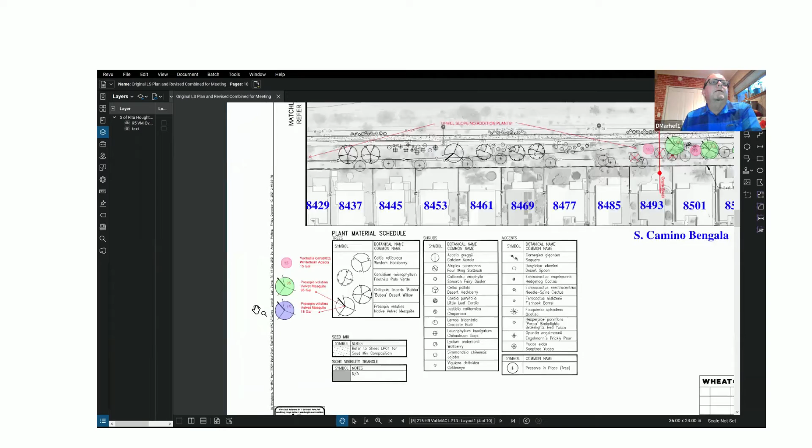One of the things I'd like to explain is what these colors represent - the velvet mesquite that we talked about. The green is the larger tree, the 95-gallon tree. If you see purple, it's a 15-gallon tree. And if you see pink, it's a 15-gallon white thorn acacia.

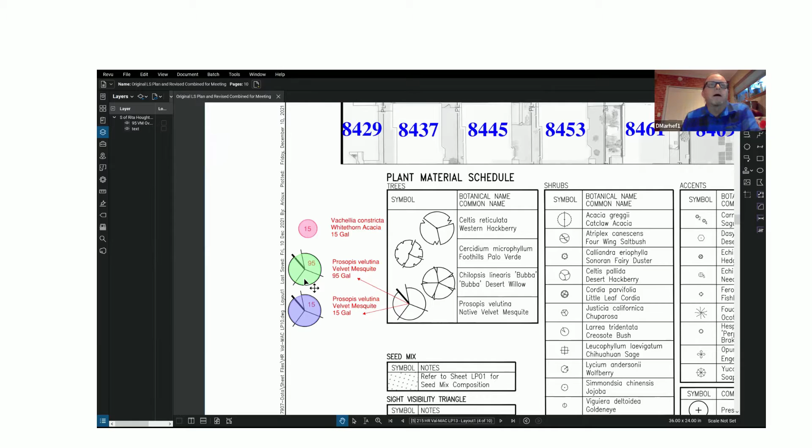There's also some other trees on here. A couple of these are deciduous, so what I did was replace those with semi-deciduous trees so that there would be some kind of leaf cover year round. We can talk about that.

And then on to the next section. You can get an idea. What I'd like to do then is go back through here - if anybody has questions and would like me to zoom in on a specific property, we can do that.

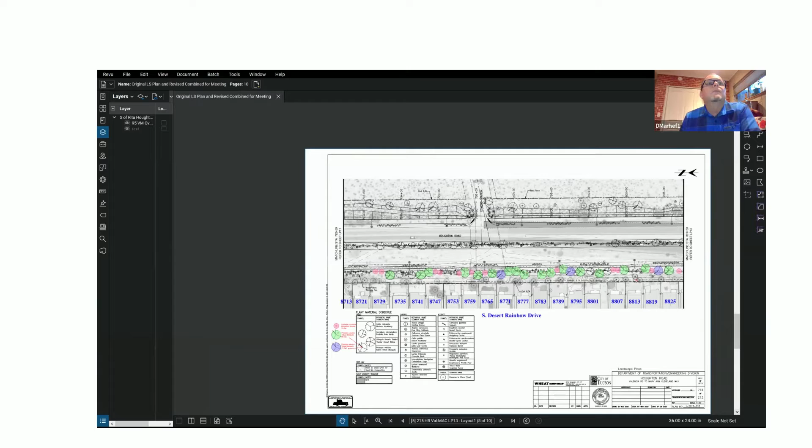Yes, can you zoom in on 8565, please? 8565? 8565? Yes, it was your third. 8565. There to the left there.

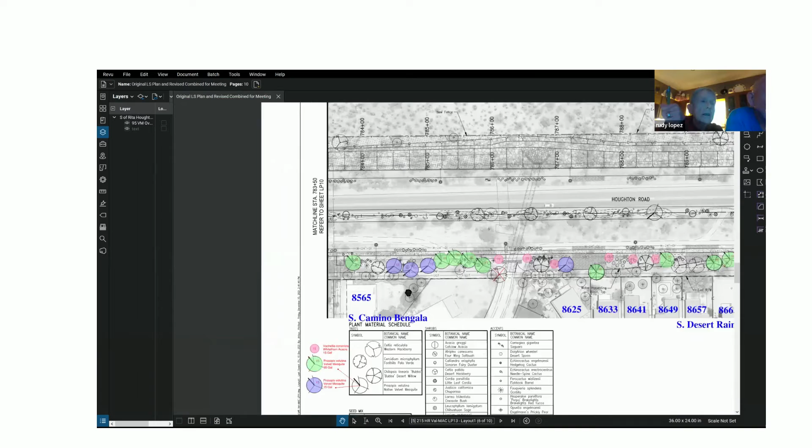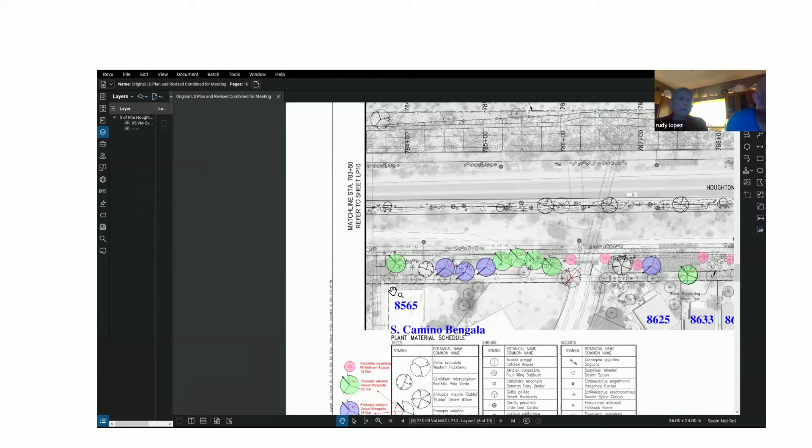Sure, so you can see here - if you can mute again, that would be helpful. Mute again. Okay, excellent.

So here behind 8565, the original plan has a foothills Palo Verde in here. And then there was also - let's go back and see what the original plan had. 8565, so you had some velvet mesquites and the foothills Palo Verde.

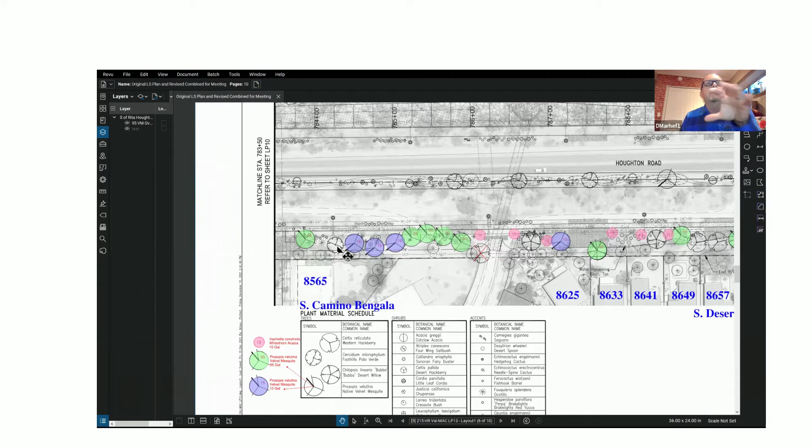So what was added in then? We added an additional velvet mesquite. What I did was I went and stood on the sidewalk, essentially looking at each property, the different vegetation that was in here, the existing vegetation on the other side of the wall, and I factored all that into the decision making.

So there is a large 95-gallon tree going in this section to fill in these gaps. There's also, because of the vegetation behind the wall and on this side of the wall, a lot of coverage on 8565 already, and we'll also be adding the 15-gallon velvet mesquites in this area. Then on the property line, there's another 95-gallon tree that'll be going in.

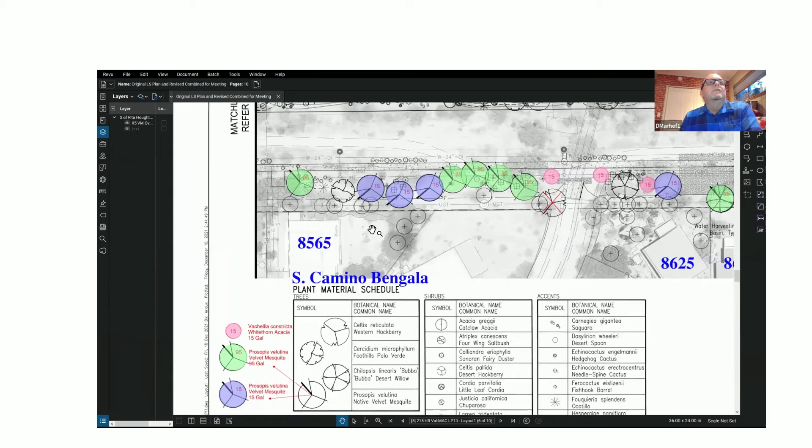Along with that, there's some ocotillos going in and some other understory vegetation. There's some vegetation going in between the sidewalk and the street in this area also. Does that help?

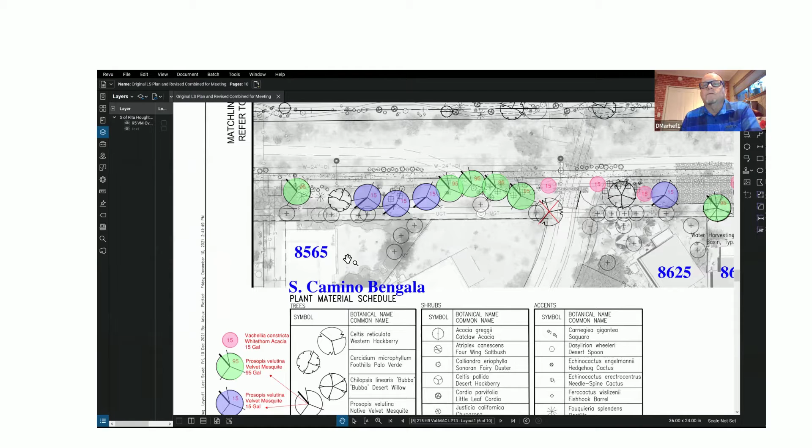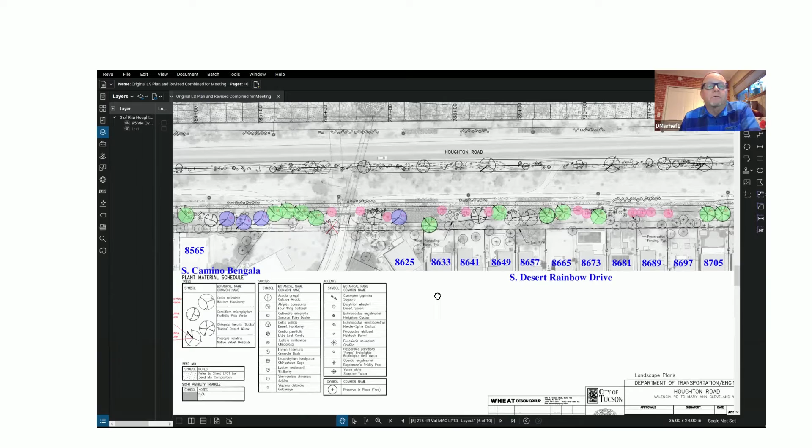Okay. Did anyone else have any questions? I do have a general question and request - will these plans be available online to review and potentially comment on? Yes, we can make them available to you. That would be excellent.

I had a question - 8437. 8437 is in an area... 8437 is in an uphill condition.

So there's an existing tree here and it's uphill, so the view out over the top of the wall will actually look out over the road. So the original plan is what we'll be putting in.

We'll be adding 2 of the 15-gallon Bubba desert willow trees in this area. They're deciduous, so they will drop leaves in the winter, so you'll have the view of the mountains, but they will also have leaves and flowers on them for a long period during the year.

So it's going to pretty much block the view during the summer, as they're 15-gallon trees. These are a hybrid desert willow, so they don't get as tall as the native desert willow - they get to about 15 feet. So they won't be blocking your view that much, plus you're already in an uphill condition in this area.

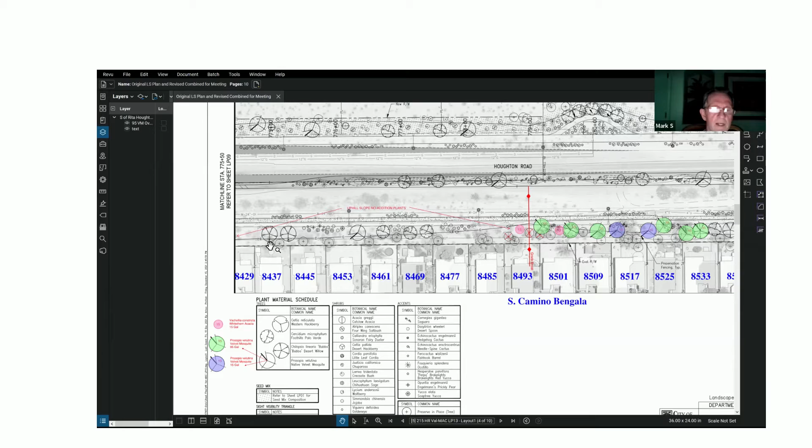Okay, now I take it the circles with the plus signs are the existing tree, right? Exactly, sir, exactly. Okay, because that one's more or less kind of misplaced, but okay.

Yeah, where they fall on the plan - when these were originally laid out, they were laid out with the aerial as it is, and it's kind of guesswork as to where the trunk falls because the canopy can be a different shape. That tree at 8445 behind there is more or less on the boundary, pretty close to the boundary line.

There is actually, right, it looks like there's another one right in this area that got missed. So on the uphill slopes, I did not go back and verify where the existing things were, just because I knew we weren't going to be changing the plan in that regard. So I didn't go and make sure all the existing things were on the plan on the uphill slopes.

Okay, now I have one question. Sure. Concerning the existing trees.

What's going to be done as far as maintenance and trimming, because those two trees, one of them extends over my wall, and my HOA tells me that the city's going to take it over. We don't know who's in charge right now, so they won't do anything as far as trimming the branches that are over my back wall.

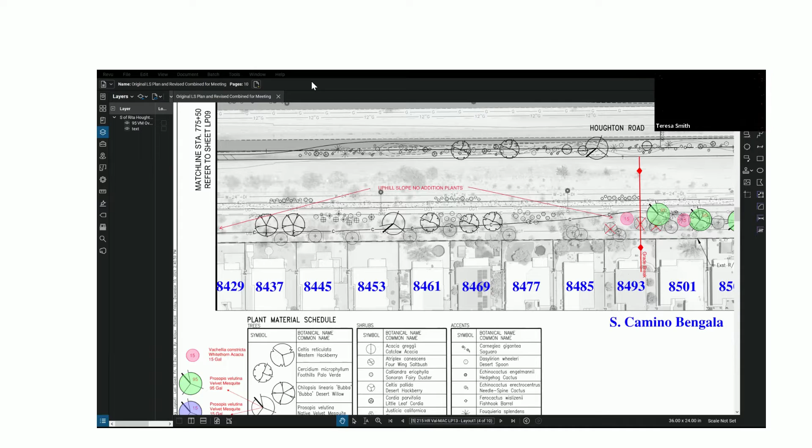As far as the plans show, I believe the gravel goes to the wall, and it will go under the existing trees as well, so there's continuity on the project. If you drive the project currently, you can see we've started to lay down some rock already, so you'll get an indication of what that's going to look like. There's finer rock in the medians, and what we call a desert cobble mix on the shoulders. Some areas will also have seed mix mixed in, so there'll be more of a native looking vegetation in those areas.

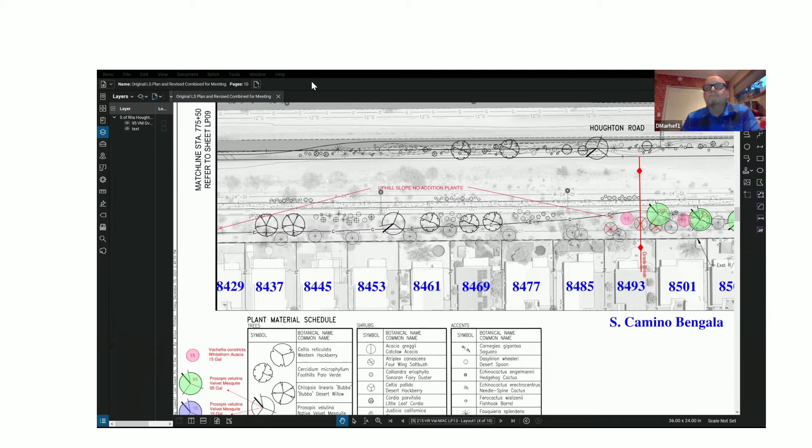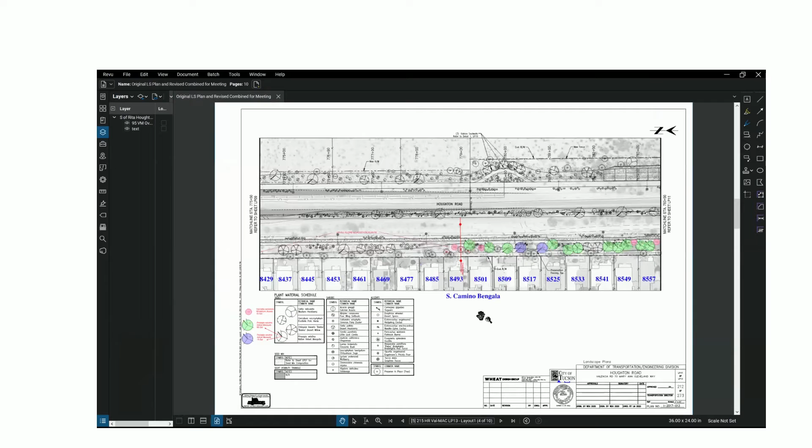Did anyone else have questions about specific properties? Yeah, I'd like to see 8843. 8843.

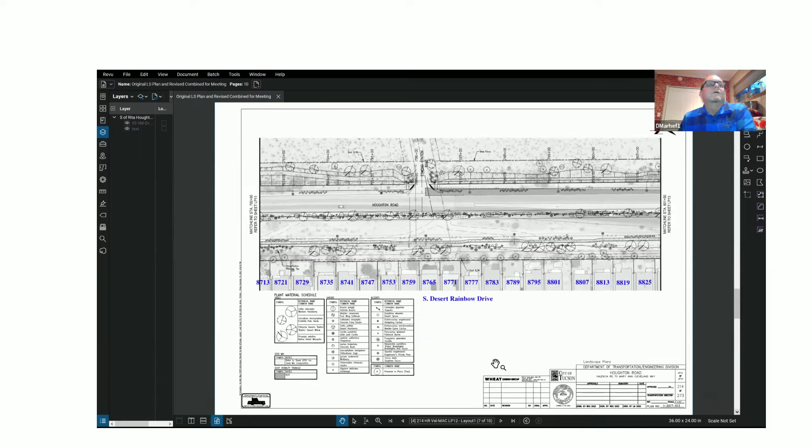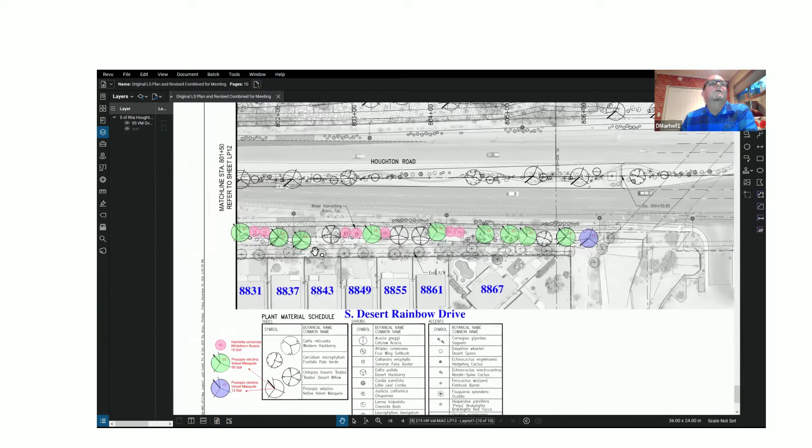So you can see here at 8843, there's a very large existing tree in this area, and also some vegetation within the yard. There's proposed on this property line to the north, a larger tree going in, a larger velvet mesquite. There's also a 15-gallon desert willow going in, and two white thorn acacias we'll be putting in as well. The white thorn acacias have a mature height of about 10 feet, and they fill out pretty well when they're on permanent irrigation.

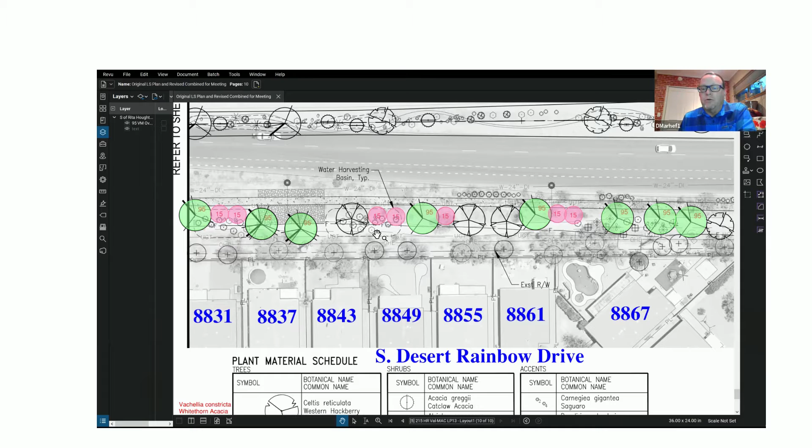Does that answer your question? It does, thank you. And there's some understory plants under the desert willow as well, so there'll be some additional planting in there.

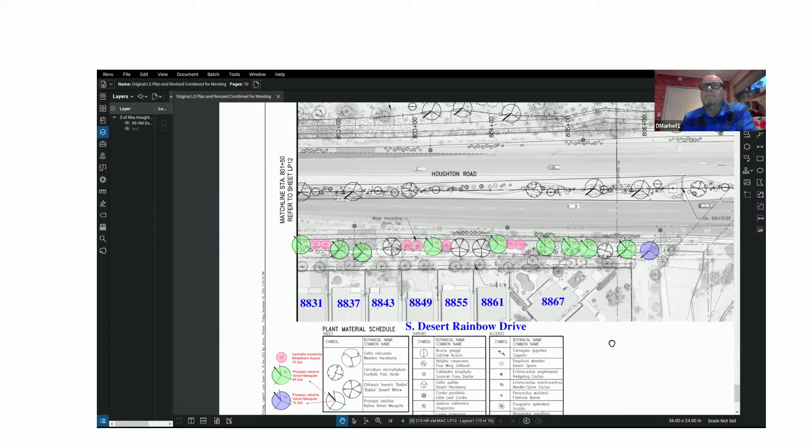Anyone else have questions about specific properties or just in general? How about 8801? 8801? Yes.

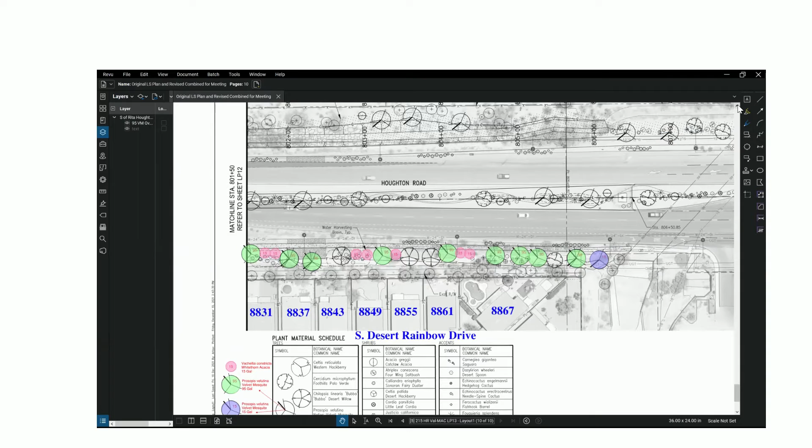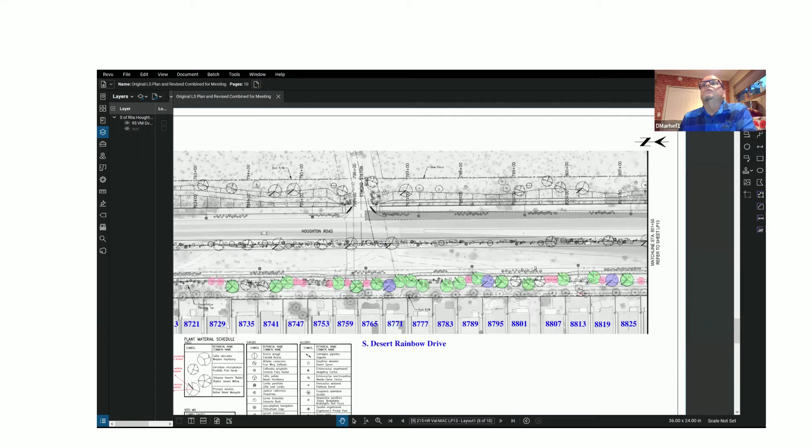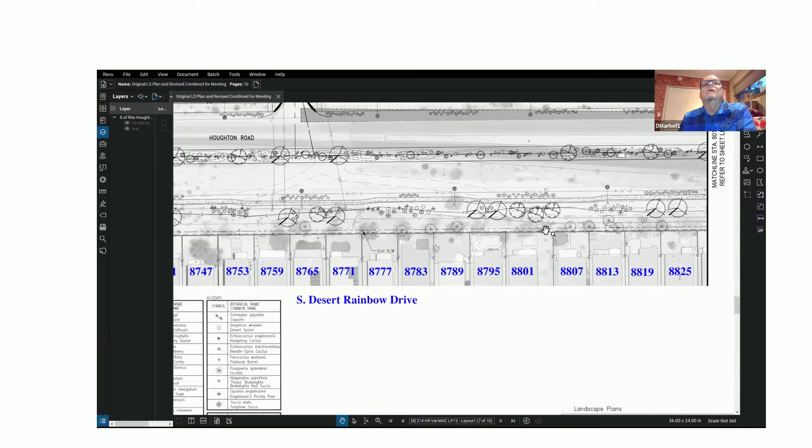So 8801, let's look at your original first. We had some Foothills Palo Verde in here, and what we went with after looking at that, there's still Foothills Palo Verde. There are some existing trees here. This looks like an existing tree, but it's not -- it was either shrubs or something, or it was taken out during construction. So there will be a 95-gallon going in this area, along with the two Foothills Palo Verdes on the side.

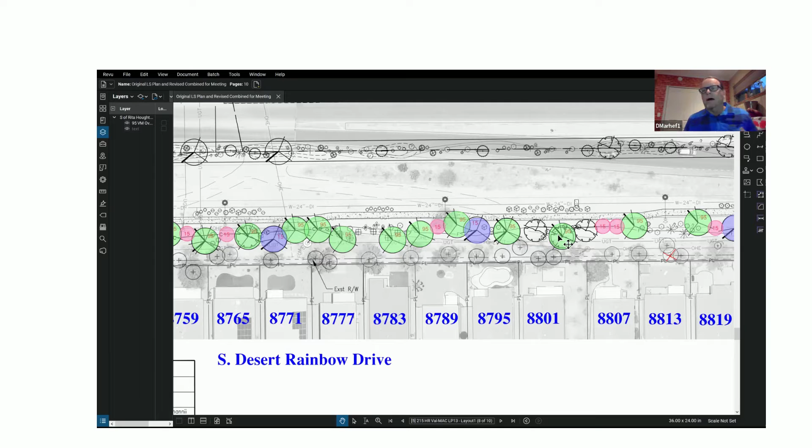So the coverage -- the Foothills grow a little bit slower, so we'll be putting those in at 15-gallon size, but the 95-gallon will go in at the size I showed you, with the woman standing next to the plant. Now, these are all going to take a little bit of time to fill out, and it will require some patience on your part, but putting in the larger trees will get that fullness a little bit higher, a little bit quicker. Anyone else?

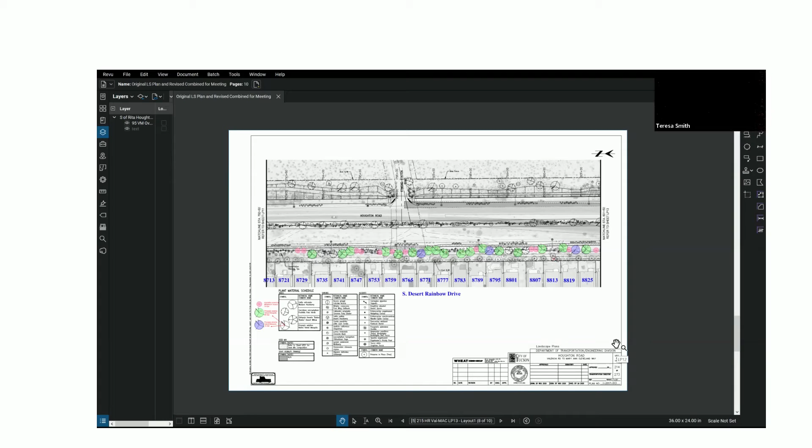David, Rudy put in the chat that the HOA was told the city would maintain the existing trees from the wall to the sidewalk. That's actually the first I had heard of that, and that would be different than what we've done before, like in Civano and some other neighborhoods. So we'll have to circle back with you on that. I'm not sure who told them that.

Typically, we don't take care of existing HOA trees, and usually we only maintain the trees that are planted by the city. It's part of the contract, actually. For 2 years after this project is complete, the contractor is on the hook to make sure that the plants are alive and that the garbage is cleaned up. I personally go myself and walk the entire project looking for dead plants, trash, and things that are supposed to be covered in what we call the landscape establishment period.

Perfect. He also had a question - this kind of leads into the next phases. He wanted to know what the time frame would be for completion. So that's going to depend.

We had a comment about putting these up for sharing and things like that. Right now, we could get this started pretty quickly and get this moving. As soon as we have finalized that everybody's on board, and if they're okay with this plan, we can roll forward with that. That's kind of what the contractor is waiting for - they're waiting for us to give them a final okay on this. And then we can give everyone else a better indication of how long that will take.

To be frankly honest, we need to move quickly because they've been ready to do the landscaping for over a month now, and we've kind of put them on hold. We all know that when we put things on hold, the price just keeps going up, and we need to get those trees planted if we want those big ones.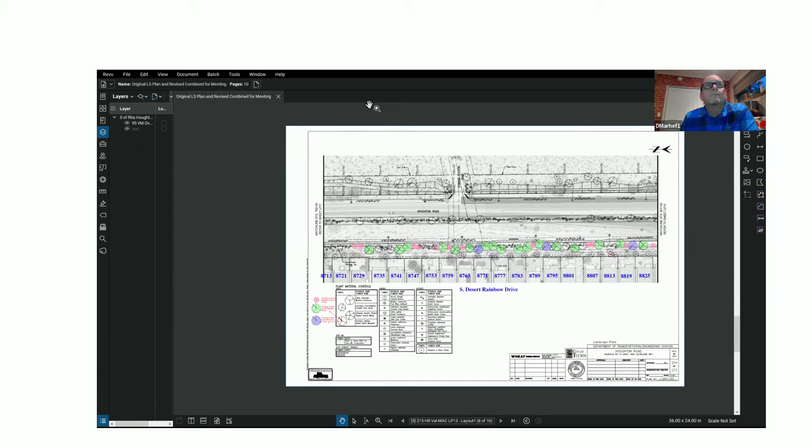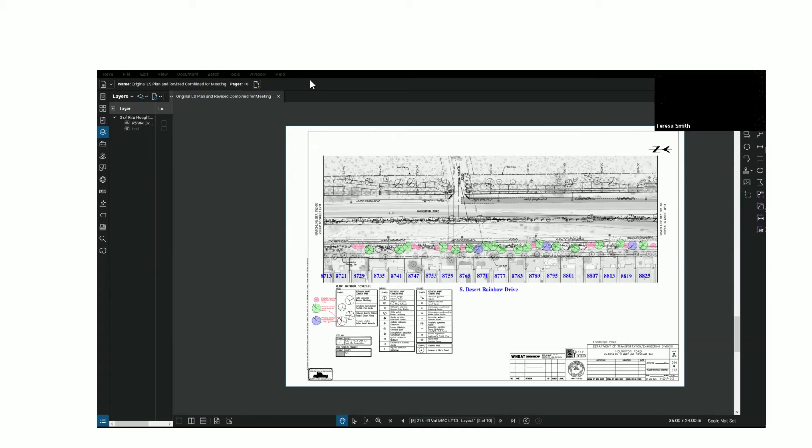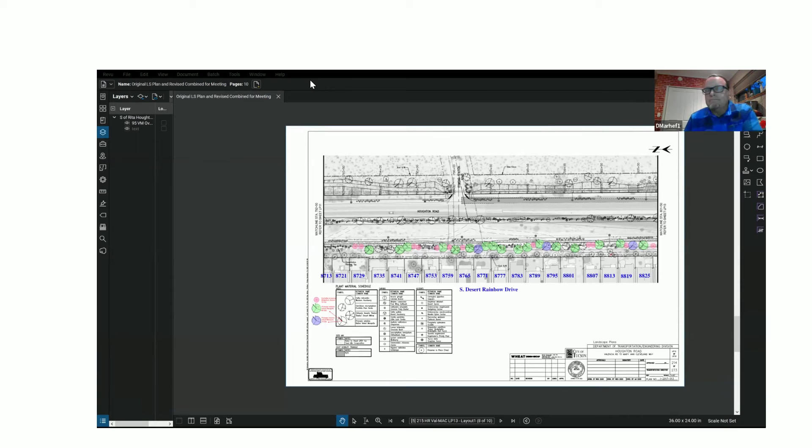Is there any other questions before we move over to Robin? Or David, did you have anything else you needed to share? I don't - if anyone has any questions, feel free to contact me. You can email me with any questions you have and I'll be happy to answer them. Fantastic, if you can put your email in the chat, that would be great for everybody.

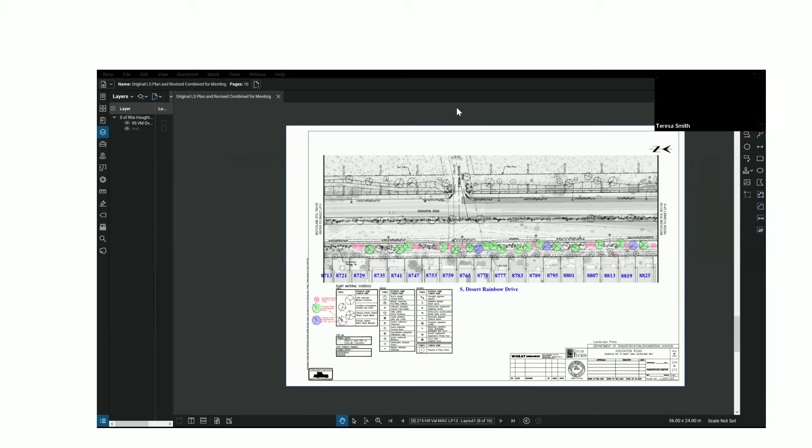Great, I think if you're ready, Robin, we can kick it on over to you. Robin's going to answer one of the questions that came up at the end of last meeting. Al Wyruth, the president of the neighborhood association, had asked about the possibility of the city being able to pay to raise the brick walls in the back of your home - your existing wall - and what that possibility might be if neighbors chose to do so. So we're going to go ahead and kick that over to Robin.

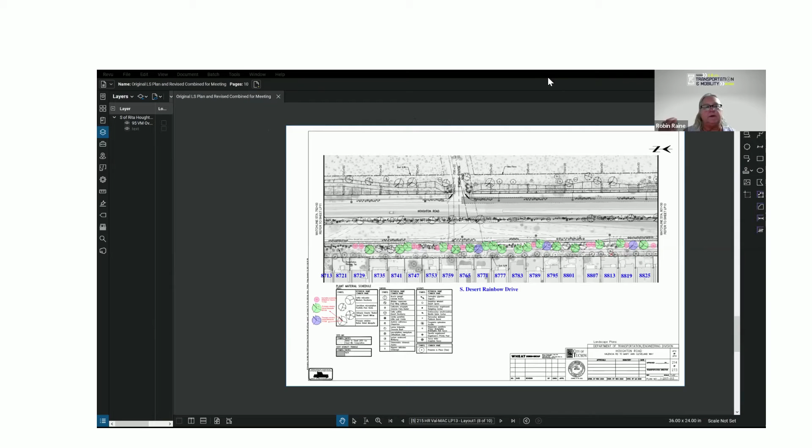We'll have a form that those who choose this will be able to fill out for reimbursement, and it'll include things like the need to have a qualified contractor. That language isn't quite worked out yet, so we don't have the application right now. But the deadline for turning in those reimbursement forms will be the end of this calendar year, so it's almost a year away.

So we're working on the form, and if you want to hold off a few weeks to get your contractor, you'll be able to see the form and see more exactly what we're needing the contractors to be, and what you'll need to tell us about them.

Lastly, I want to make sure you heard that the deadline is the end of the year. Mainly we want to make sure we know that you've done the work, you've got the invoice, and you've got the proper contractor, and then we'll be able to do that.

But I'd wait on sending that information right out, because we'll have a form with all the ways to prove your contractor's qualified and all that stuff. So, any questions?

Robin, this is Al Wyruth. I have a question for you. What happens if people have already had the work done by a contractor, and that person may not be on your qualified list? Would they still have the opportunity to submit and get a reimbursement up to $2,000 by the end of the year?